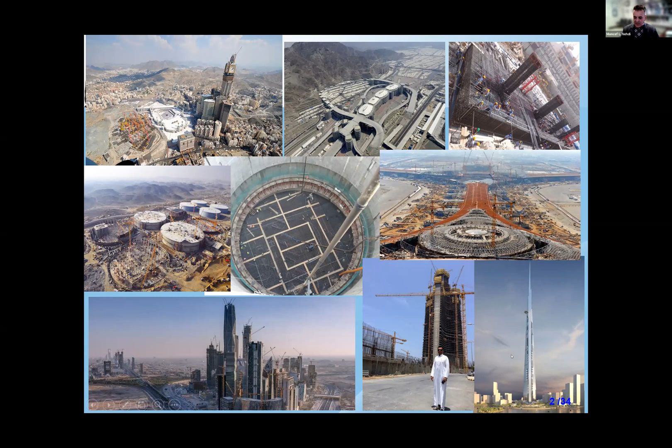So there are multiple challenges. Now, in terms of policy, the concept of sustainable development on its own is revolutionary, but it remains difficult to be tangible and to quantify. Engineers, when I talk about this to my students and colleagues, like to quantify things, to talk in numbers. So it remains a vague and ambiguous concept, and that did not allow the creation of a real paradigm, an operational framework for really implementing policies that lead to meaningful results.

So the policy-making aspects are incredibly important in what we do. We heard a lot about amazing technical results going on, but I think we have to put this in the frame of policies.

I won't spend too much time on this, but the issue of climate change, or sustainability, perhaps emerged in 1972 at the first Earth Summit in Stockholm, where the declaration raised the issue of climate change for the first time. It took until 1987, when the UN General Assembly adopted the environmental perspective for year 2000 and beyond, which introduced the notion of sustainable development.

However, it was a bit disappointing. It's a very big document, but it just put the issue of climate change as a small item under the policy directive related to energy. 1988 saw the Intergovernmental Panel on Climate Change, the IPCC, created and meeting for the first time - a forum for examining greenhouse warming, global warming issues, and climate change related considerations.

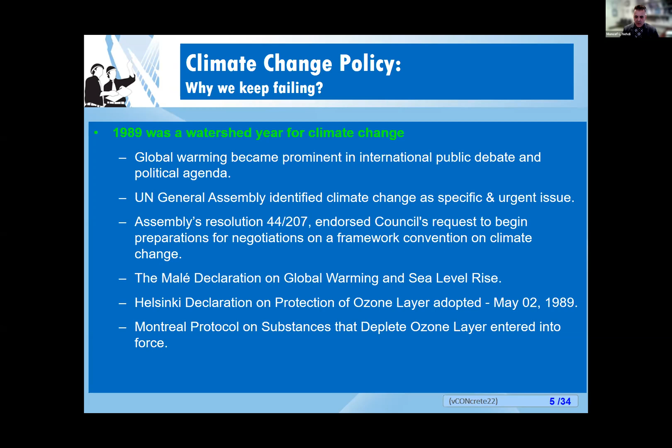1990 was the Second World Climate Conference, and again here the issue of climate change was further emphasized, with calls for negotiations underlining the urgency.

Then the Rio de Janeiro General Assembly of the United Nations added further aspects, with about 158 states joining to sign a declaration to pursue meaningful results in curbing CO2 emissions and climate change issues. Then there was the Berlin Mandate, followed by the Conference of the Parties, COP1.

Remember this COP1 term, because now we stand at COP26. Then there was COP2 in Geneva, and the Kyoto Protocol, which is COP3, where there were quantitative targets - we wanted to reduce CO2 by 5% below 1990 levels, etc.

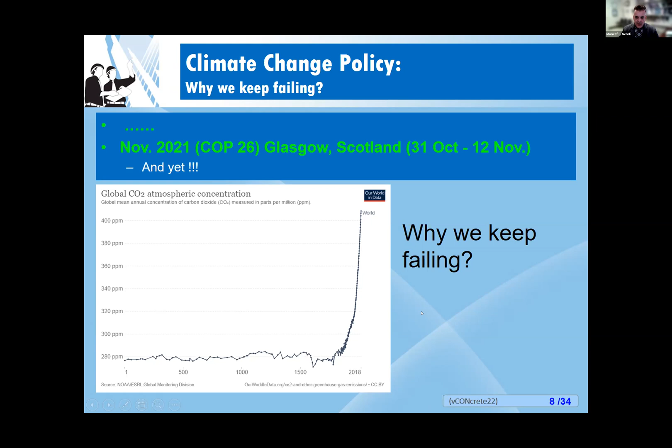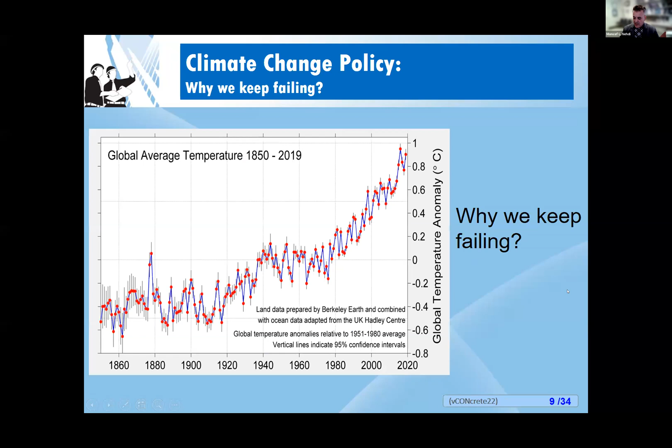Why have we organized all these conferences, emitted all these policies, agreements, signatures, and so on, only to attain a result like this, where CO2 emissions keep increasing and climate change is turning into an existential threat to humanity? Looking at the global temperature, it's escalating, and this is not linear. You have the ice cap melting, but then the ice cap is not reflecting enough solar energy as it used to, and things escalate, becoming really dangerous.

Now, looking at our own turf, the cement and concrete industry, the construction industry is a big participant in all of this. It's the third largest source of anthropogenic emissions of carbon dioxide after fossil fuels and land use. If you consider it as a country, it would rank third after China and the United States in terms of carbon emissions. And if we look at what we've achieved with all these policies, two-thirds, maybe more, of CO2 generated from cement production has been produced after 1990, which is the peak of policies for reducing CO2 emissions.

So it is a tremendous challenge. It is a tremendous challenge, but it's also a tremendous opportunity. There are predictions that the CO2 market is set to reach $600 billion of annual revenue. That is gigantic, so there is tremendous opportunity there for making change.

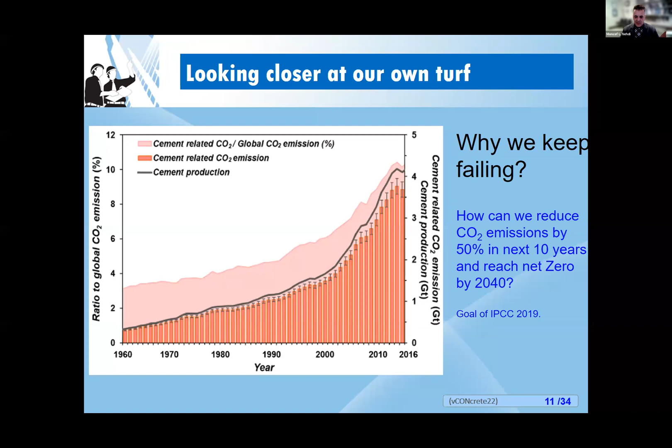So how can we reduce CO2 emissions from cement and concrete by 50% in the next 10 years and reach net zero by 2040 or 2050? How can we do this if this is our track record? If we don't pay attention to the policy issues, are we going to end up with the same results we've had in the past?

Now, we should not deny that there has been tremendous progress made, since the modern cement kilns, which reduced the energy of producing cement by about a third, the attempts for clinker reduction using supplementary cementitious materials, alternative supplementary cementitious materials—we had several talks on that today—effective admixtures and so on, and the contribution of standards, guidelines, and design codes, which can shift concrete production toward more sustainable practice.

But there are many other opportunities that have been exploited and have not been fully exploited yet. Alkali activated materials, though they can occupy a smaller market share. We heard Karen Scrivener talking about LC3 and LC2, CO2 curing and carbon sequestration, and we heard Caijun Shi also touching on that. The aspect of mineralization, capturing CO2 for example to make aggregates, and all the material sciences aspects, such as what Nemkumar Banthia talked about today. The contribution of artificial intelligence, where we can actually provide more predictive tools to design concrete mixes with lower carbon content.

And yet, transformative, truly disruptive solutions have not yet been developed. As Karen Scrivener said, there is no silver bullet.

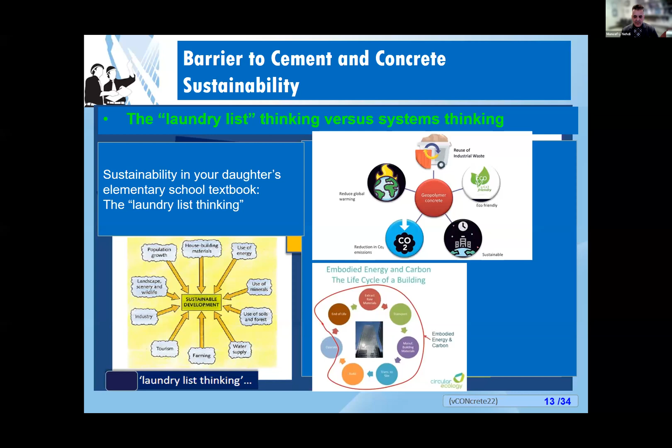And you don't see tremendous differences between those diagrams. Why? Because we have not captured the complexity of the problem through systems thinking.

Let me give you an example to make this simple and tangible to all the students listening today. Let's say somebody says sales are bad because marketing is inadequate. You could say after that, well, marketing is inadequate because salespeople are not motivated. And then you can follow that logic and say salespeople are not motivated because of this or that. So you can see that through mental models, we can always find another event that caused the one that you initially thought was the cause.

So mental models do not see the complexity of interrelationships and time-dependent feedbacks. Mental models tend to be fuzzy, incomplete, imprecise, and they change with time. They change within the same debate. You talk with a person within the same debate, and their mental model can change. Therefore, such models cannot handle the multi-loop, non-linear feedback systems for which the tools we use—contemplation, intuition, discussion, guesswork—are all futile.

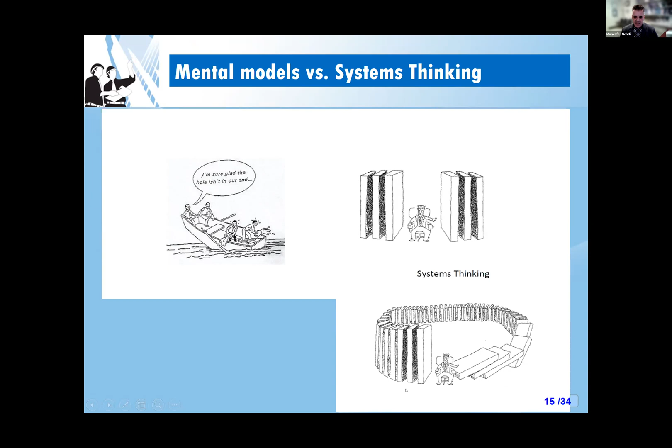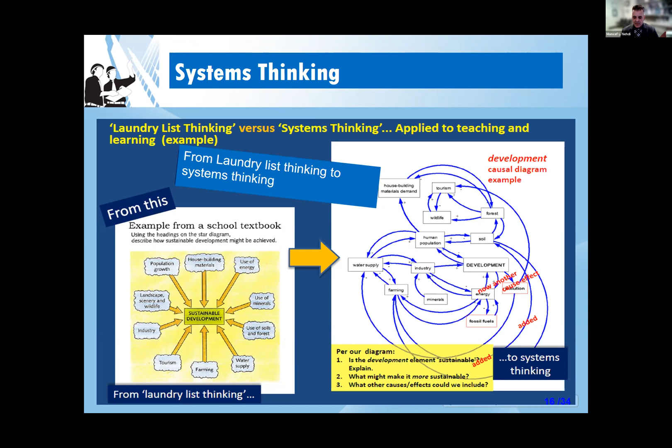That looks complex, right? How can you think about that? It's very... but actually, when you start learning systems thinking and system dynamics, that approach becomes second nature to the way you consider things.

So what is systems thinking? Very quickly, in very simplistic terms, it's a holistic way to investigate factors and interactions that could contribute to a possible outcome in a complex system. So it sees wholes and patterns rather than static snapshots, as mental models would perceive things. It focuses rather on the interrelationships and not on the things.

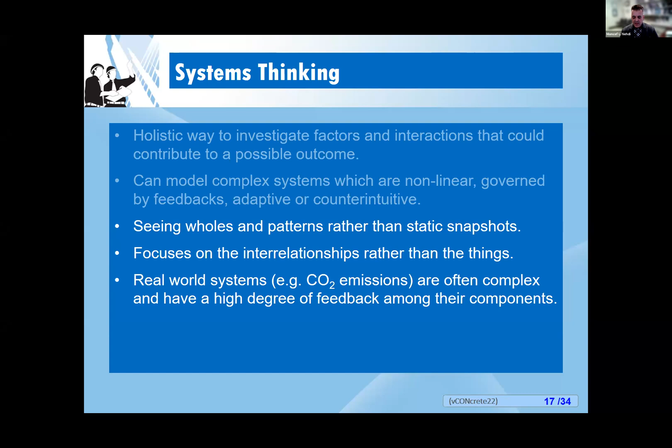For example, take the issue of CO2 emissions from cement production. That's a complex system and has a high degree of feedback among its components. And if you don't account for such effects, then the policy making that you do through the industry and through the design codes can be futile at the end.

Here's another example to make it even simpler. Take traffic congestion. We have a neighborhood where we get a lot of traffic congestion. Traffic is terrible. So the mental model to solve this would say, all right, let's build a new highway, let's build a new road. And once that's done, after a while, that policy fails.

So now you're facing the dilemma that you're spending public money to solve problems—we see this a lot with our politicians—and it turns out the problem is worse. Why is this? It's because we don't capture the feedbacks. So now you built a new highway, the initial traffic volume becomes very low, it becomes nice to travel there, the neighborhood becomes very attractive. People say, hey, wait a minute, I can buy my car, I don't need public transit. And the developers say that neighborhood is very attractive, let's build more houses and so on. Eventually, the problem that you wanted to solve becomes a bigger problem.

Take another example. There is a neighborhood in town that has a lot of poverty, a lot of homeless people. So the mental model will say, okay, let's build a lot of social housing there. And they build a lot of social housing.

Initially, the problem looks like it's solved. But what happens next is that area becomes very attractive to low-income people, and you get more people coming in, with the possibility of increased crime and so on. Investors who had businesses there say, wait a minute, I don't like this neighborhood anymore.

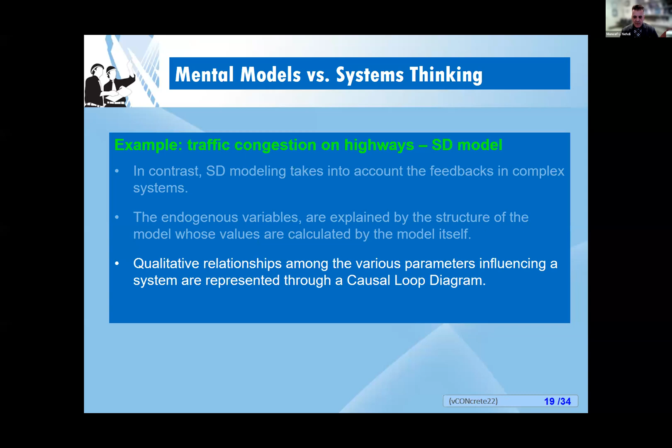They move somewhere else. So you wanted to solve a problem through a mental model, and you created a bigger problem. In contrast, system dynamics captures those feedbacks and implements them in the policy making, so the complex endogenous variables that will surprise you are accounted for directly inside the structure of the model itself. How do we do that? We do that through what we call the causal loop diagram.

Here's a simple causal loop diagram for the traffic congestion example I talked about earlier. This is not by any means comprehensive, but it captures population growth, how many cars in the region, how many cars per person, the situation of public transit, the adequacy of the public transit, and the desired travel time.

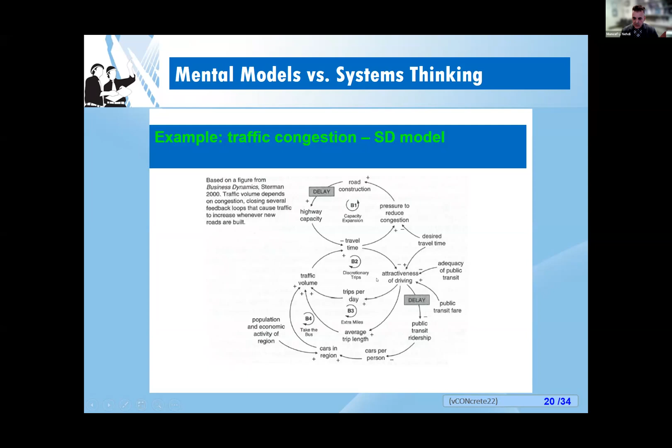What are the pressures to reduce congestion, what's the highway situation, and so on. Through such a layout, you see those positive and minus signs. I'll explain those a bit later. We try to capture the complexity of the problem.

Systems thinking and system dynamics are essentially grounded in the work of Jay Forrester at the MIT Sloan School of Management in the late 1950s. Forrester was initially a computer engineer. In fact, he contributed to the development of memory storage and so on, but he's also credited as the father of systems thinking.

What's the difference between systems thinking and system dynamics? Because I keep mentioning the two terms. Well, they're kind of two sides of the same coin. Systems thinking focuses more on exploring the interrelationships, creating causal loop diagrams. Systems thinking is something you can do on a piece of paper with a pencil. System dynamics takes that to a higher level.

Barry Richmond is credited for taking system dynamics from an academic environment to the business world through the creation of, for example, the program Stella. And there are other programs like Vensim and so on that do this on a computational level.

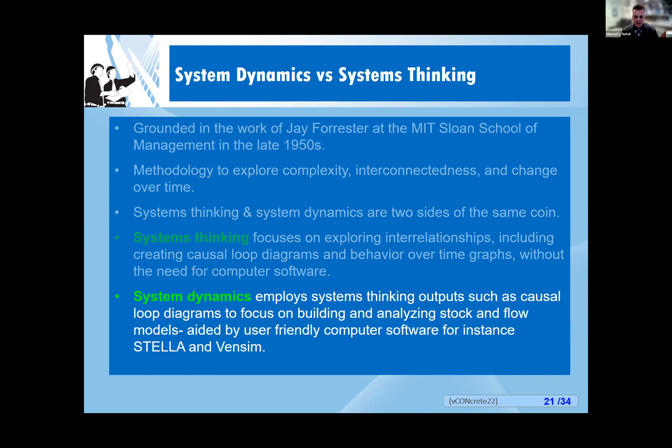So what these systems do is try to capture feedbacks. And feedbacks in a system, there are many different kinds. I don't want to spend a lot of time on this, but systems thinking captures feedback such as, for example, a population of bacteria with nutrition. The bacteria will grow very rapidly, and then as they consume the nutrition, there is an overshoot and then a collapse of the population, and things like that.

Take an example of when you open a water tap to fill a container. Your eye has the control policy for your hand to open the tap, and then you keep observing, so there is feedback, time-dependent feedback. You're looking at the water filling the stock, which is the bucket here, and then sending information to your eye. That is what system dynamics tries to do on a rather more complex system.

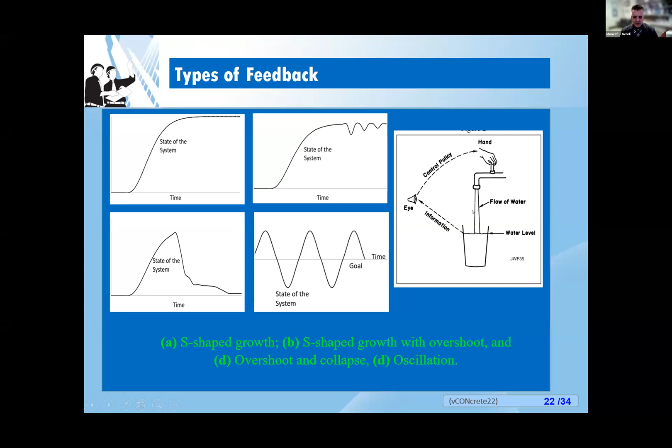How does it do that? Well, beyond the causal loop diagrams, you can build a sustainability model for CO2 emissions, for example, through simple building blocks shown here in a simplistic way. First, connectors. They are represented through arrows, and they represent the relationships between elements in the model. The stocks are where things accumulate or where things are spent from.

For example, how much cement is being produced is represented through those blocks like squares or rectangles. Then you have the converters, represented by circles, which essentially are math operations or algebra showing how parts of the system influence each other. Then you have the flows, which basically represent quantities. They are represented as something like a tap, like the rate, for example, of cement consumption and things like that.

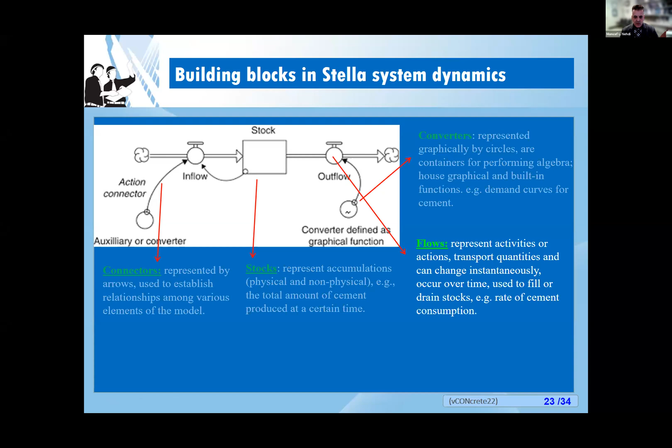Using these building blocks, as I mentioned, I'll explain the plus and minus signs. When you see a plus sign, essentially more of the same thing produces more of the other thing, or less of the same thing produces less of the same. For example, if your self-esteem goes up, you accomplish more. If your self-esteem goes down, you accomplish less.

The negative sign is if something increases, it produces a negative effect. So the more you spend, the less you have in the bank, kind of thing.

Now, taking this to a more practical level, let's say this is a simplistic model for the effect of alkali activated materials on CO2 emissions. It sounds like a simple system where you have precursors and activators, mix them, and produce something, then look at how many cubic meters you're producing and how much CO2 is being reduced.

But it's not like that. There are multiple issues influencing each other here: the concrete, the durability, the economy, how much construction is happening, the availability of materials, the durability aspects, the carbonation, the CO2 emissions, all this.

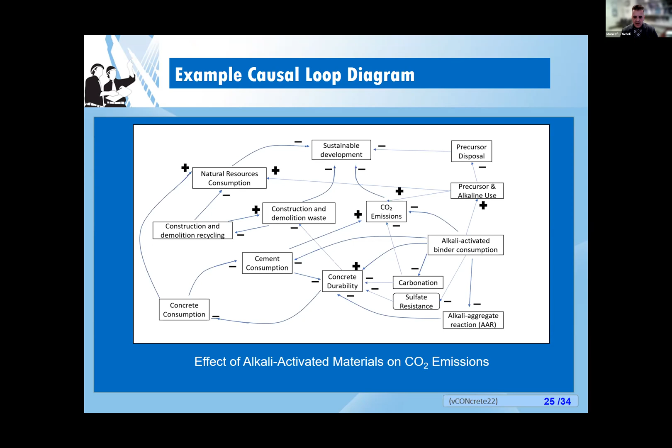You try to capture that through a model that looks like this in terms of a causal loop diagram. And you take it further, to a system dynamics model, for example in a STELLA environment, and you try to build your model, coming up with rational, mathematical relationships that demonstrate the effect of different parts of the system on each other versus time, which is quite a challenging part of creating the model.

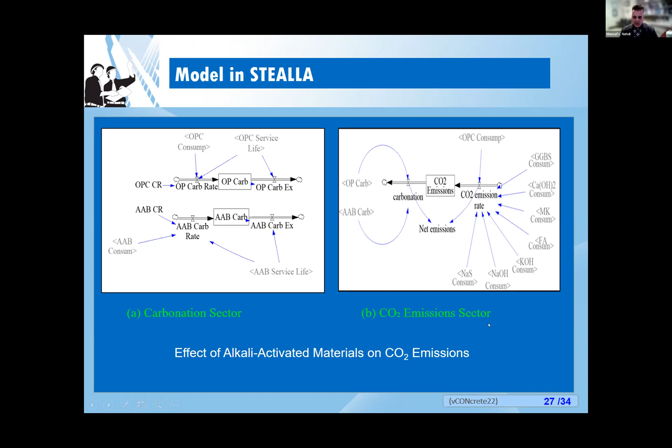Now, when you look at this model, it looks simplistic, but parts of that model are also sectors. So there are multiple sectors influencing each other. For example, on the left here, the carbonation sector. On the right, the CO2 emissions sector. And here you see the alkali activated materials composition sector.

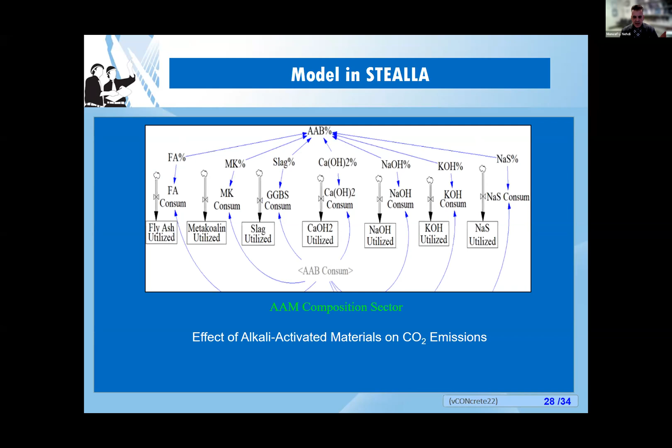So using such sectors and building blocks in a system dynamics model, we can create something for policy making. Now let me be transparent and frank here: policy making is not about predicting the future. It's not about saying in 2069 corrosion is going to start. It's not like that. It's a tool for policy making, and therefore it's built on assumptions.

That's not enough. How's the economy at that time? What is the trend of population growth in the next 50 years? How is the economy going to evolve in the next 50 years? What are the pressures and policies? How is the climate change impact going to affect humans and all that? Multiple assumptions like that will give you different policy trends.

So system dynamics is essentially a way for capturing complex systems, and it's a way for policy making. What it adds to the picture is that instead of thinking linear, simplistic, and deterministic, once you capture the complexity of the problem through causal loop diagrams and system dynamics modeling, you get more realistic predictive trends of the future.

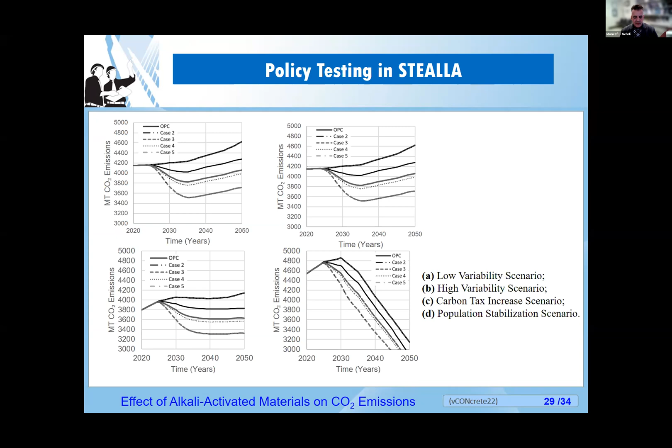Now, we have done a bit of work on this. We published, for example, a system dynamics model for sustainable cement and concrete as a novel tool for policy analysis. Another one is policy making for greening the concrete industry in Canada, a systems thinking approach. The third is estimating CO2 emission savings from ultra high performance concrete using a system dynamics approach. The fourth is mitigating Portland cement CO2 emissions using alkali activated materials, a system dynamics approach.

My dream challenge now, because I do a lot of computational intelligence and artificial intelligence modeling and prediction, is if I can couple artificial intelligence with system dynamics. I think I will need another 10 or 15 years to do this, but it's quite a challenge. Now, I want to invite you

to study this further. I think we have a lack of literature in this domain, and many of the young students and researchers listening today probably can have significant contributions in this field that is under-researched.

So you could look at, for example, publications of Jay Forrester, who is the pioneering American computer engineer and the father of system dynamics. Also Barry Richmond's publications—he's a PhD graduate of Jay Forrester, and he took that to business level, creating High Performance Systems Incorporated, the company that developed the Stella and iThink modeling approaches.

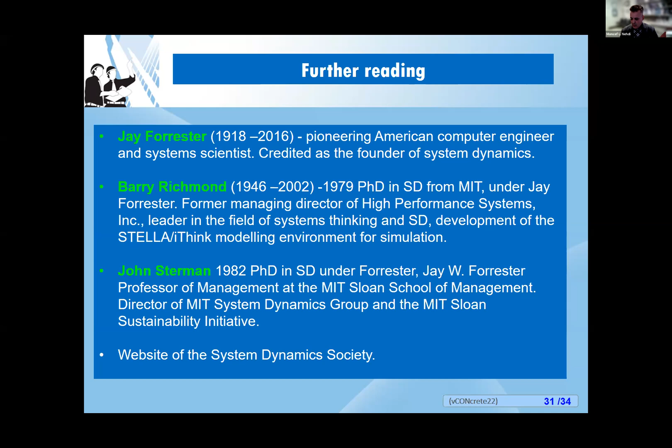There is a website for the System Dynamics Society, which is a great source of information for those who want to study this further.

So maybe I could try to make it brief by touching base on some concluding remarks. I remember one of my great mentors who taught me when I started making long and boring presentations. He told me, Moncef, a presentation is not intended to impress people by how much you know. It's intended to get people interested to know more, so you make it short and invite them to search for more information or reach out to others because the topic seems interesting. So that is what I'm trying to achieve here.

Strategies and policies deployed over the last several decades to decarbonize the economy have by and large failed. There are some limited successes, but the outcome essentially is that climate change has risen unabated to become an existential threat. We see symptoms of that around the world: extreme weather events, more abundant wildfires, more frequent hurricanes, more frequent droughts, rising sea levels, melting ice caps, and changing dynamics of plants and animals. It's a tremendous challenge that is coming our way.